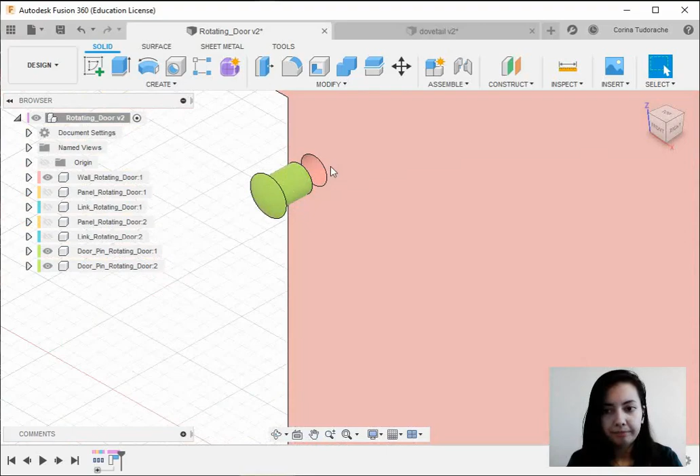Let's first discuss what types of joints we have. Here I have a model. Let's say I want to add a joint right here. I'll go to Assemble, As Built Joint, select the components wanted. As you can see here, I'll drag this around so you can see it better.

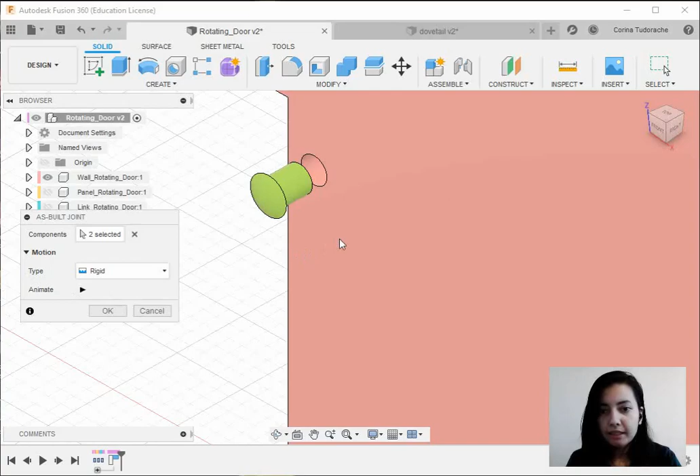I have more types of motion. Those are rigid, revolute, slider, cylindrical, pin slot, planar, and ball. Each of these different joint types restrict or allow certain degrees of freedom. Let's check them one by one. I'll rotate this a bit so you'll see it better. Good. Rigid doesn't allow any motion at all.

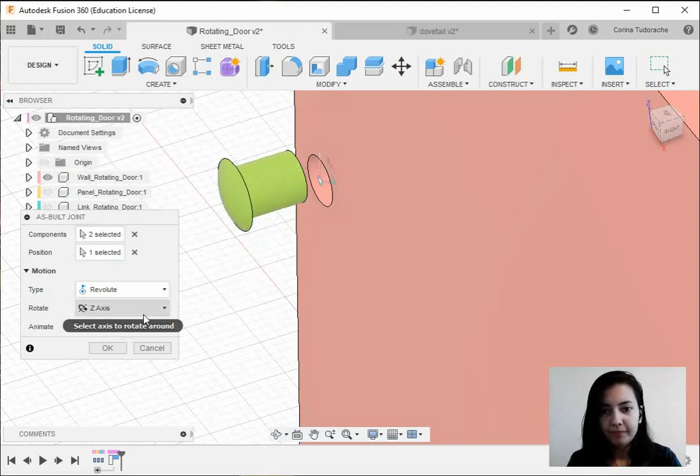Revolute joint, let's say here, like you can see, allows one rotation that will be around X, Y, Z or custom axis. Rotation means movement. The movement is around that axis.

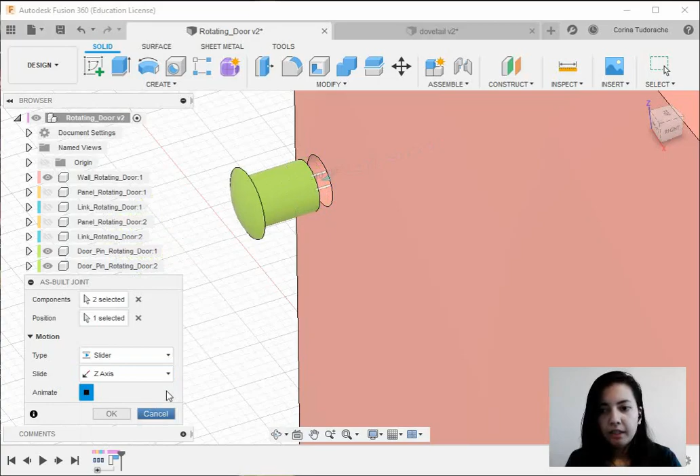Slider, as you can see, allows one translation, also on X, Y, Z or custom axis. The translation means the movement is along one of these axes.

Cylindrical, I'll move this here, let's say here. As you can see, if I stop it a bit, I have two directions, and cylindrical allows for one translation and one rotation. Pin slot allows for one rotation and one translation.

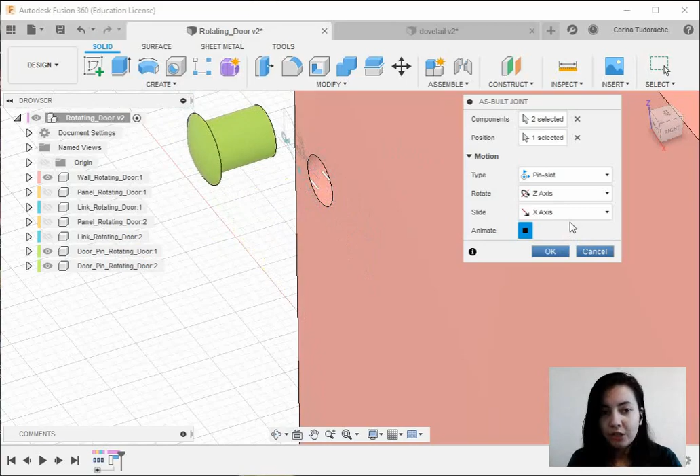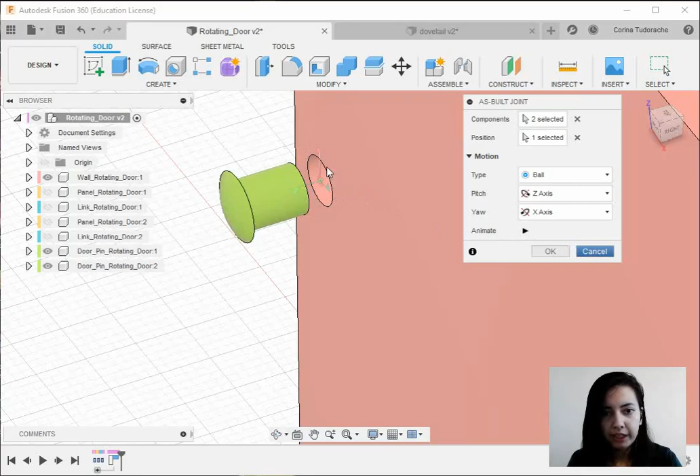Planar allows two translations and one rotation. And ball allows for 3 degrees of freedom. As you can see, I have 3 axes right here, 3 degrees of freedom. So, you can use these different types of joints depending on your needs.

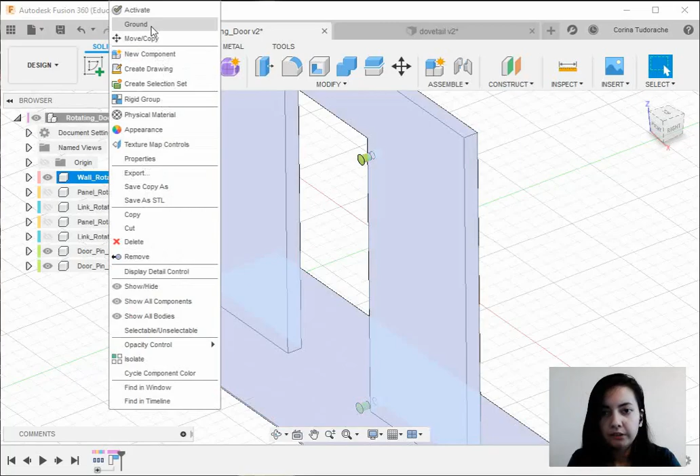One important aspect here is that joints will only work on components. They will not work on bodies. Also, you want at least one of your components to be grounded. I'm going to ground this wall. Right-click, ground. And now it's stuck in this position. I can't actually move it around anymore. It's stuck like that.

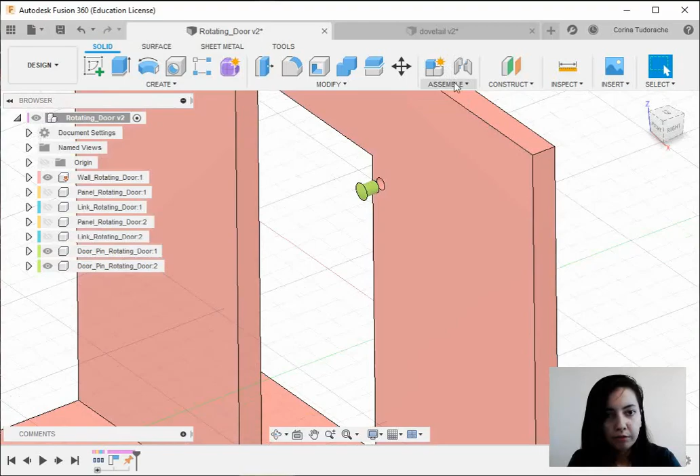Let's say I want to add a joint here. From the Assemble, I go to Joint. Now the base is almost transparent. I can say it's translucent. That means I can't select it. I want to move this piece right here. The component we select first moves to the second one. I want to bring this small piece right here to the base and assemble them together.

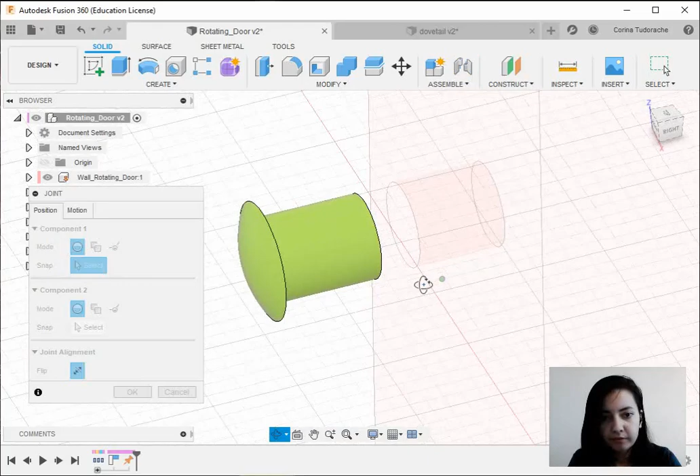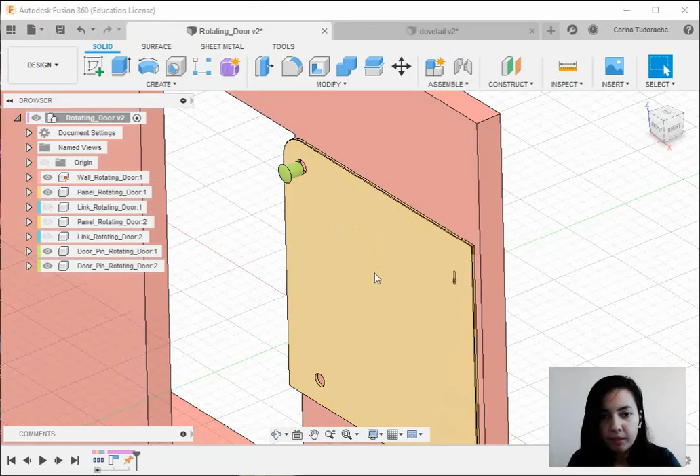And if I want to do that, click here. Let's say click here, and that's my joint. That's my rigid joint actually. But what options do I have? Well, let's see. I toggled the visibility of this one so you can see it better.

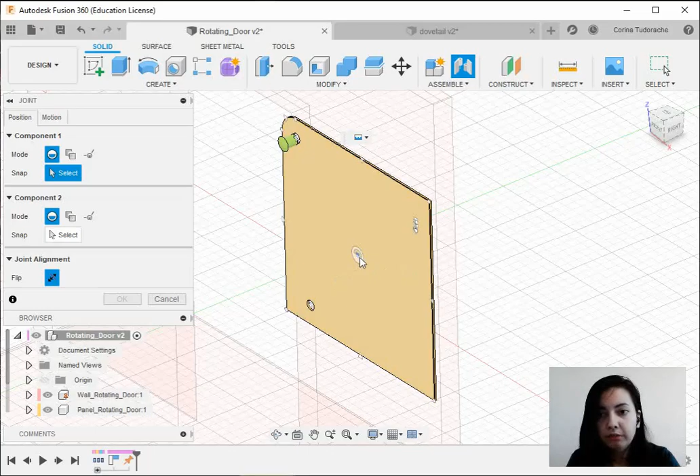If I go back to Assemble and Joint, and let's say I want to select this panel right here. As you can see, as I hover the cursor over the component, Fusion suggests different points that I can select, like lines, like endpoints of lines, like midpoints, centroids actually of mass, centers of holes, like this, and even arcs and center point of arcs.

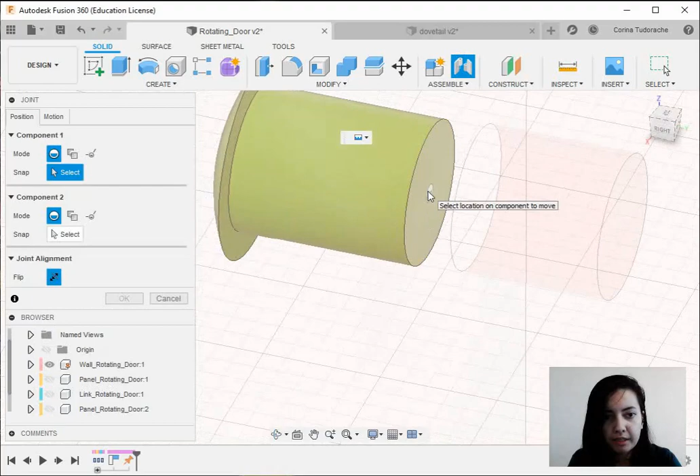My choice is really simple. I'll toggle the visibility once more. I chose the centroid of mass here. And that piece right there.

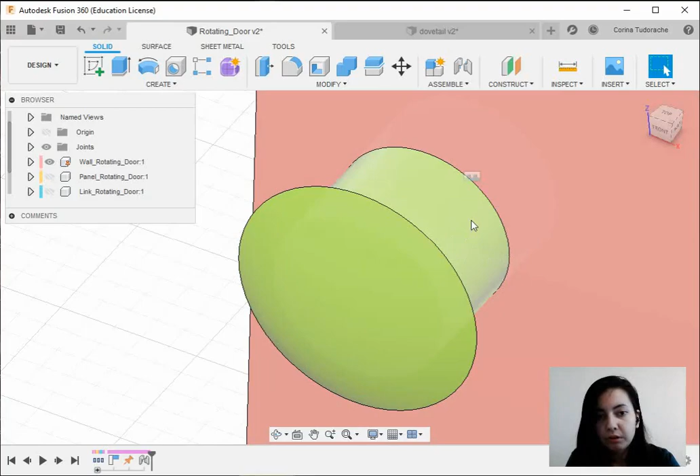And click OK. If we're curious what other types of joints would work here, I can go to edit because I closed this dialog box. I can always go to motion and check the other types of movement to see if it works for me.